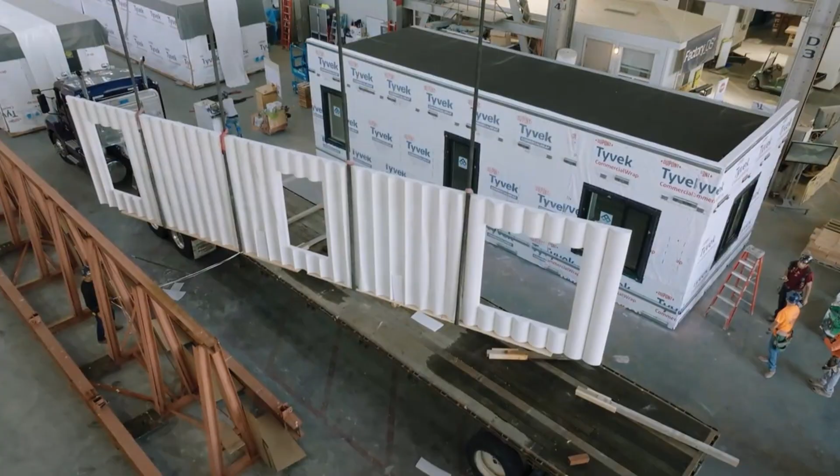Buildings are long-term assets, often standing for many decades or even centuries, and while initial capital costs can be significant, it is the operating costs such as energy consumption, maintenance and repairs over the building's lifespan that often has the greatest financial as well as environmental impact.

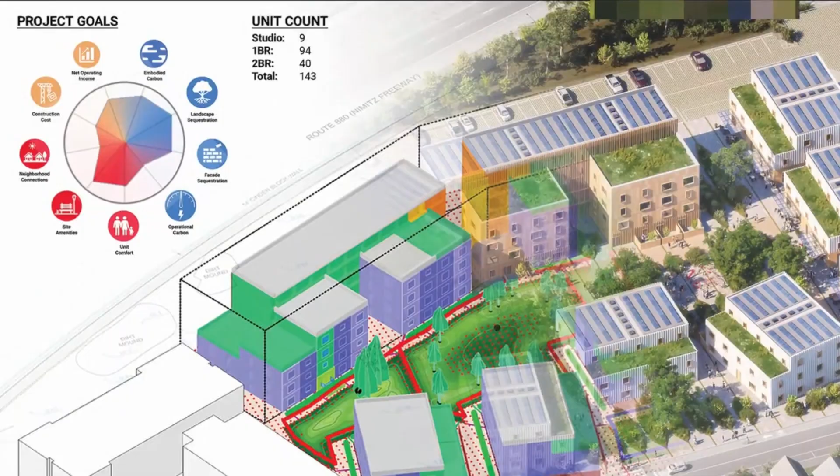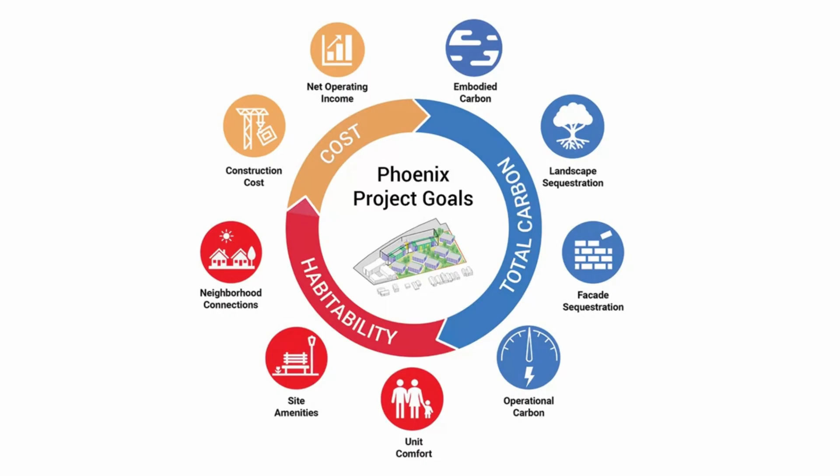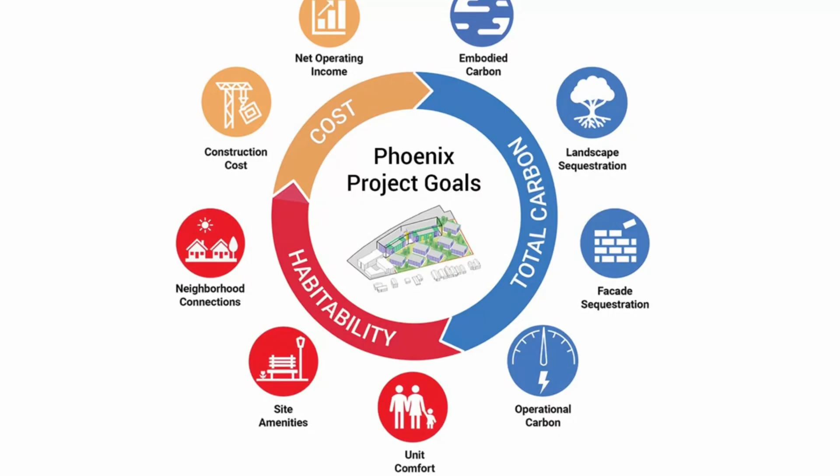Traditionally, BIM has focused on producing deliverables such as 3D models, documentation and asset information at handover stage. However, BIM is evolving into an outcome-based process where design and decision-making are guided by key measurable success metrics from the outset, such as achieving sustainable outcomes like optimized energy efficiency, carbon neutrality, or reduced waste through the project lifecycle.

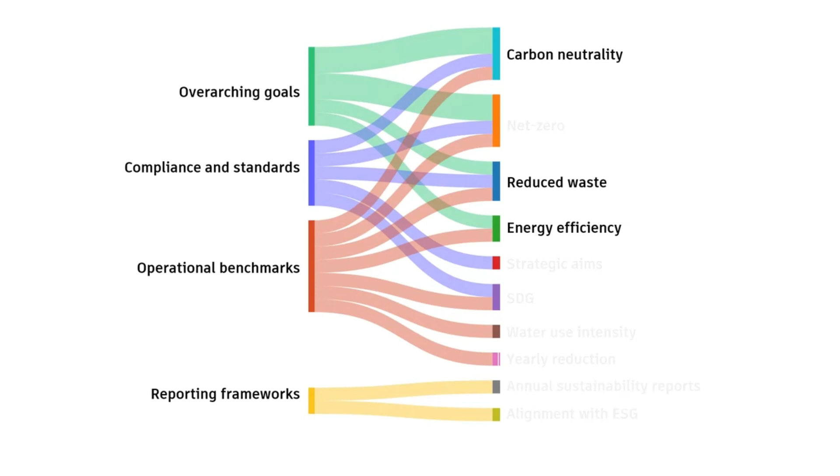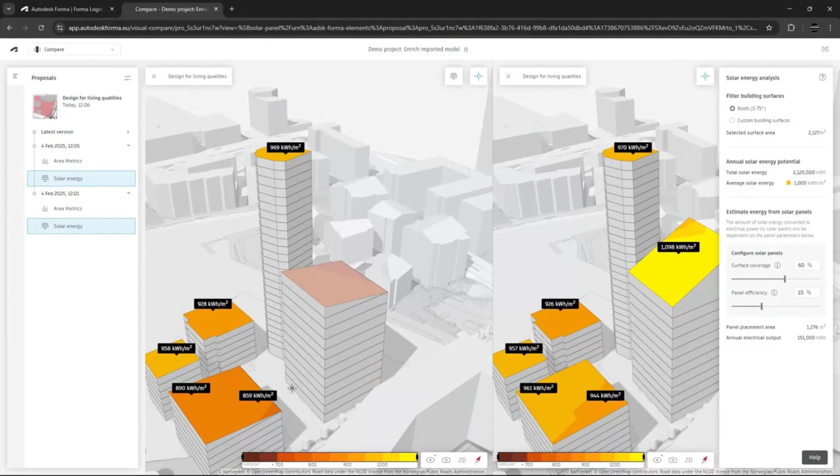In construction projects, key success factors are identified early, for example, meeting environmental and client sustainability goals such as energy efficiency, carbon reduction, and long-term operational savings. With thousands of decisions to be made throughout a project cycle, AI-driven tools can play a crucial role in processing data, performing complex calculations, and generating predictive insights. And these tools produce data that helps teams make better informed choices that align with sustainability, efficiency, and financial outcomes.

The foundation of outcome-based BIM is data. Data that is granular, accessible, and open, uniting teams across the project lifecycle. And the earlier in the design process you can analyse solar gain or measure carbon footprint of building materials, the greater the impact you can have on the outcomes.

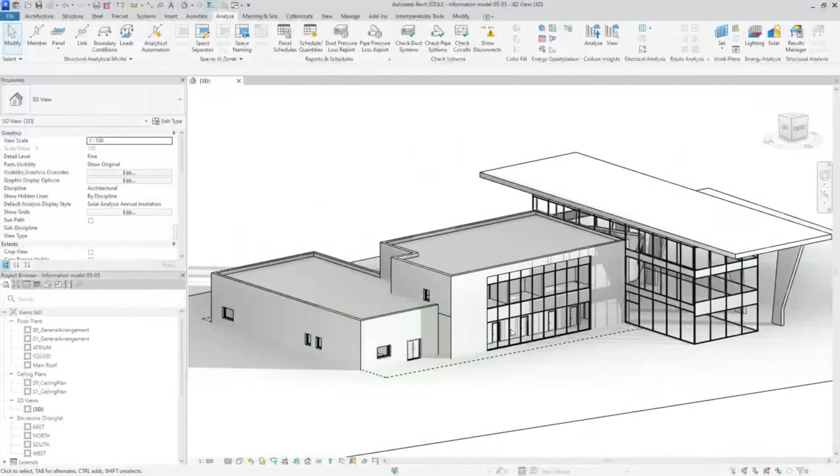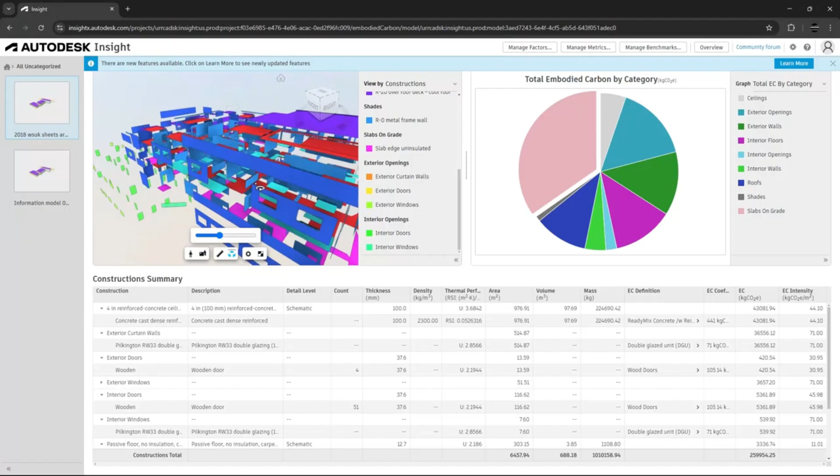This shift towards outcome-based predictive insights is made possible as AI-powered tools like Autodesk Forma allow designers to analyse design and make more informed decisions from day one. Leveraging information-rich 3D models, teams can optimise energy efficiency through early-stage simulations, plan proactive maintenance to extend asset lifespan and reduce long-term costs, and make informed design choices backed by predictive insights.

Rather than replacing designers, these tools produce data that helps teams make better informed choices that accelerate the design process and enhance decision quality through better and more informed data.

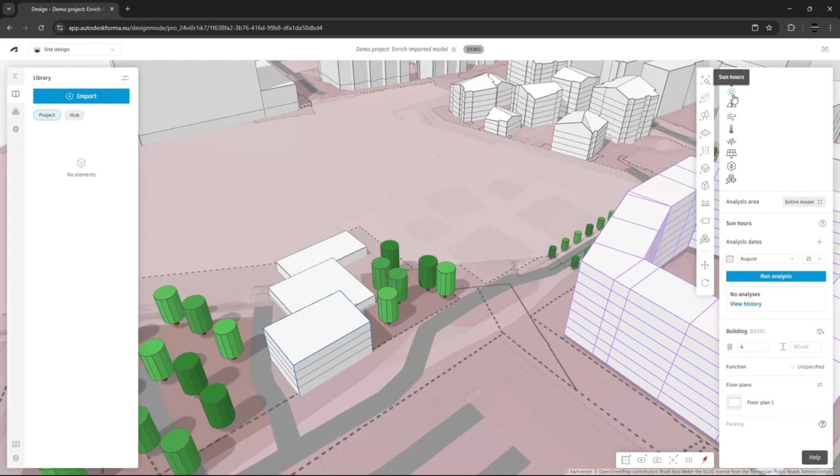Achieving better sustainability and environmental outcomes begins in the early planning stages by analysing site-specific environmental data such as wind speed, sunlight exposure and noise levels. Designers can develop more efficient solutions at the earliest stages of the project, using tools like Autodesk Forma.

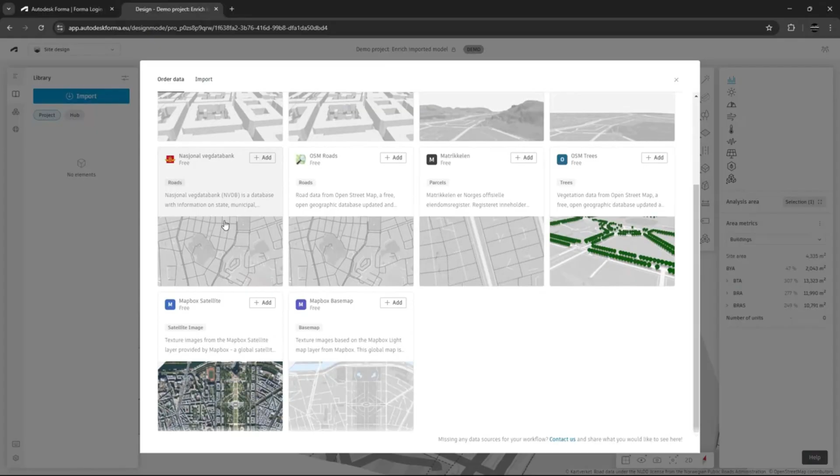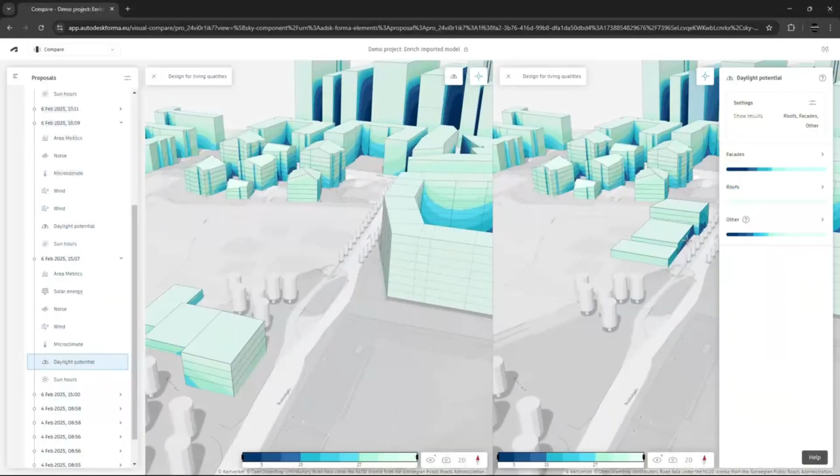This approach streamlines workflows by accessing existing contextual site data with preloaded geolocated weather conditions, massing models, and environmental insights, reducing redundant time in data recreation, saving time and cost, and facilitating centralised collaboration, ensuring that all the stakeholders work from the most up-to-date design version and can easily see the impact of decisions on the outcomes.

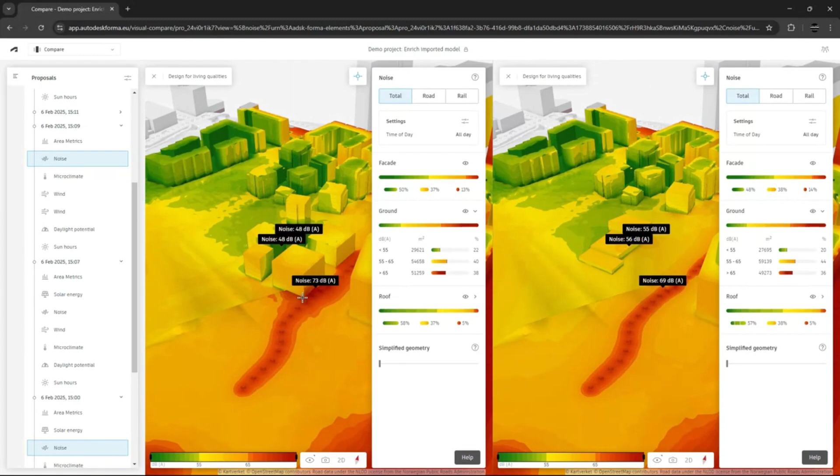Integrating environmental analysis directly into the design process allows for continuous refinement of concepts, and instead of validating designs after key decisions have been made, teams can easily and quickly maximise daylight exposure for occupancy comfort and energy efficiency, minimise noise intrusion through early-stage site analysis, and optimise building performance by balancing thermal comfort, energy use, and operational costs.

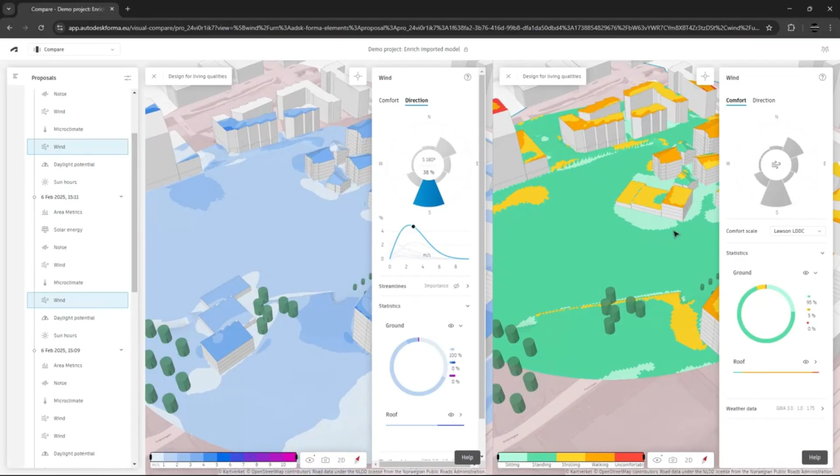While the strengths of AI lie in the ability to process vast amounts of data quickly, designers apply their expertise to balance competing priorities, and it is their decisions that ensure project goals and outcomes are met effectively.

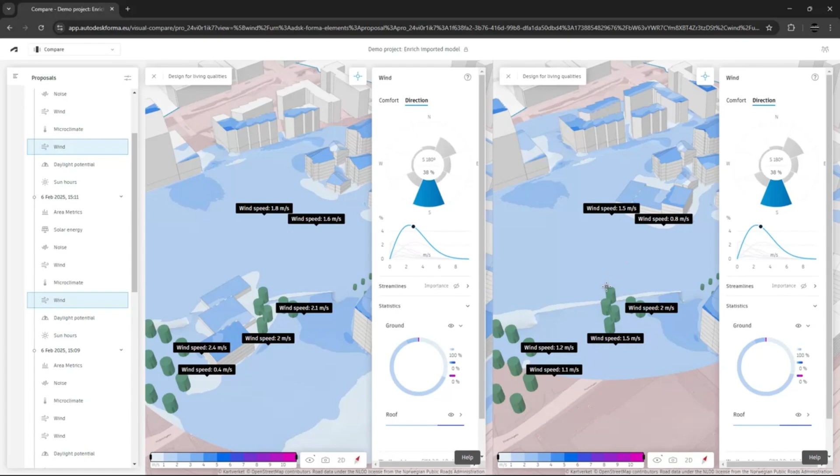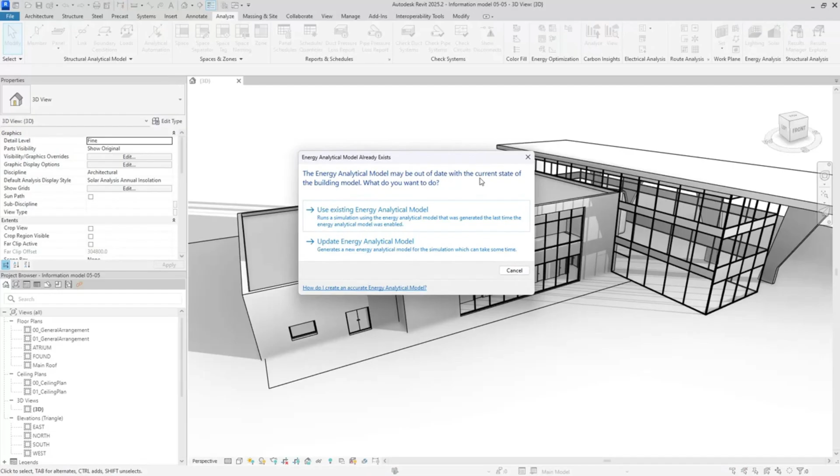Outcome-based BIM is not limited to the conceptual design stage. During later stages of the project, and with more detailed 3D models that include material performance, resistance values, as well as room function and other information, designers can create energy analytical models directly from the Revit model, which saves time and removes the need to recreate separate models for analysis.

By sending the energy model to Autodesk Next Generation Insight, the analysis is done in the cloud, and once analysed, designers can use pre-made dashboards and cards to easily report targeted outcome metrics graphically to the wider team.

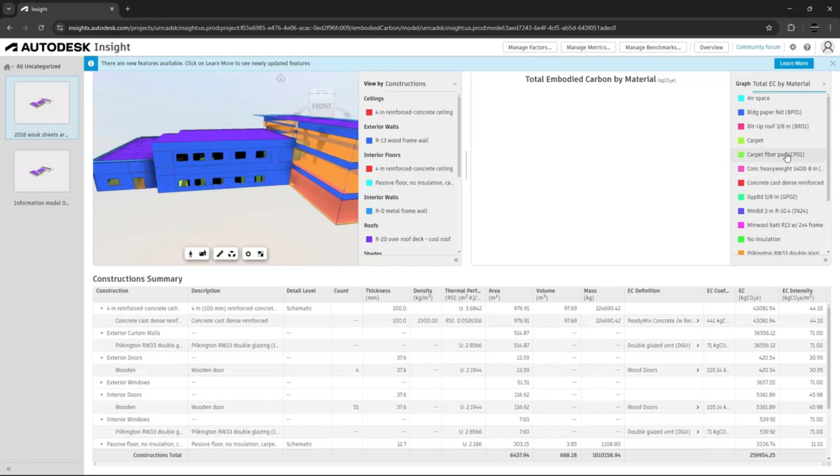Construction and other details, such as the lifespan of a building, is communicated and customisable. Changing the lifespan feeds back instantly in how it affects your outcomes in relation to total carbon.

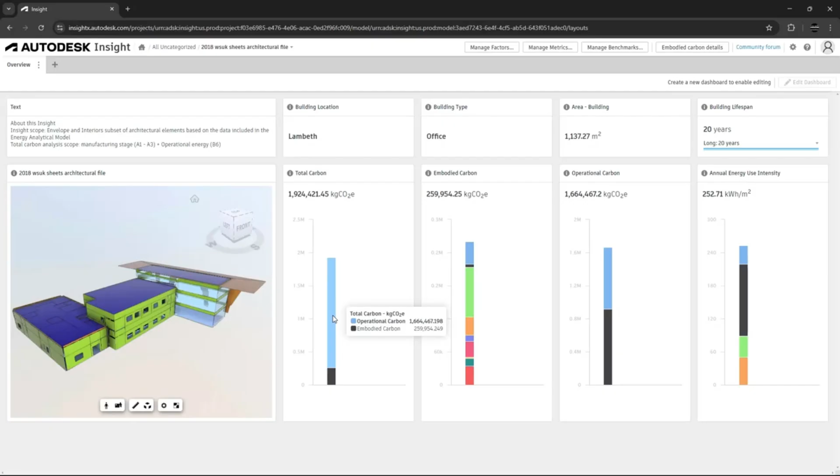Embodied carbon remains the same as expected. However, in this example, it is the operation of the building over 20 years that will produce the majority of the carbon, jumping up quite considerably and demonstrating how the efficient design of a building could have the largest impact in reducing this through reducing energy use and other performance factors.

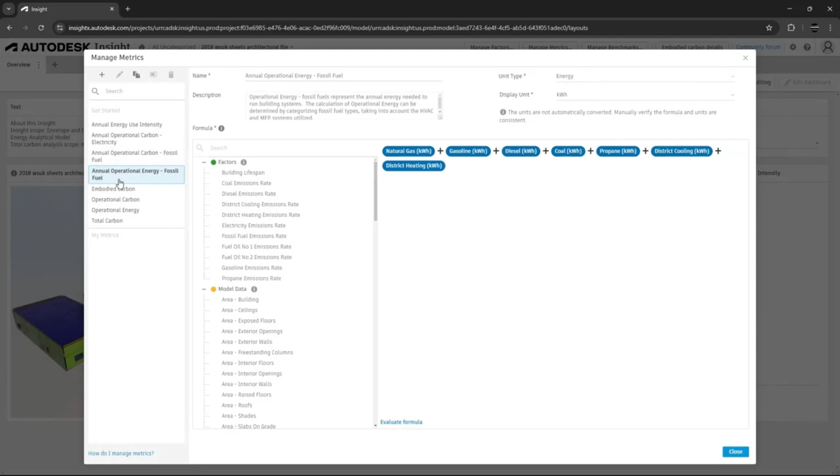By simplifying analysis through the use of AI and other outcome-based tools, project teams can make better data-driven design choices with fast cloud-based simulations, customize and track key performance indicators, focusing on the outcomes that matter most, and collaborate seamlessly, ensuring that all team members work with the latest performance data.

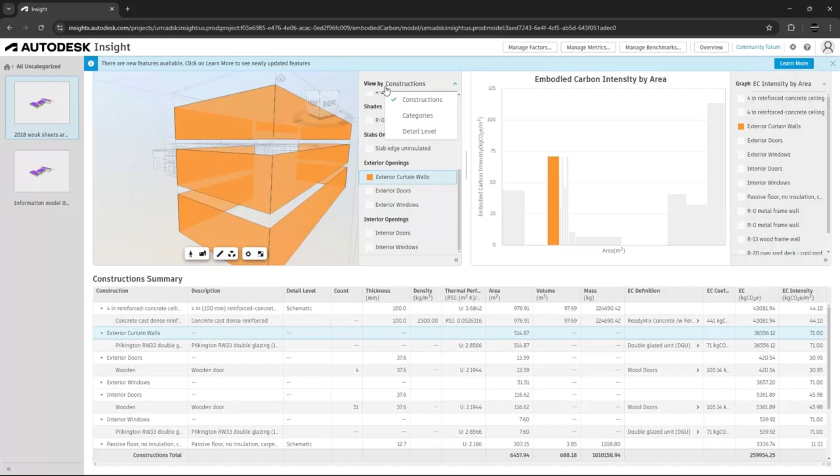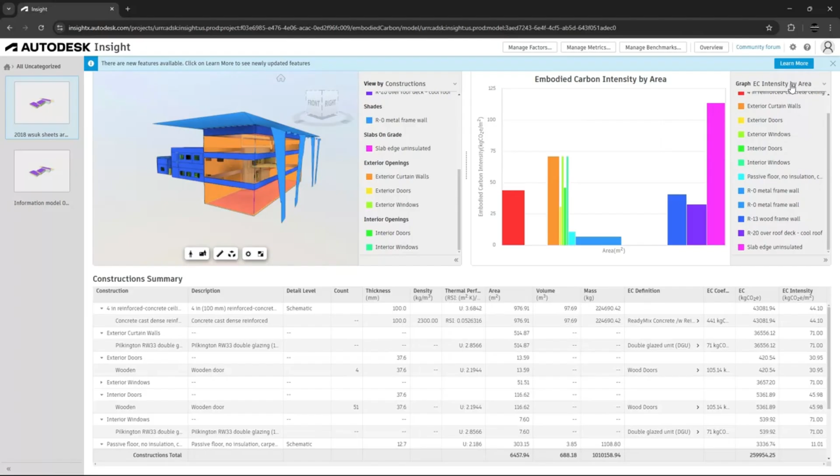Outcome-based BIM is transforming how buildings are designed, constructed and managed, unifying workflows across the teams that design, build and operate the built environment. This approach enables better data-driven decision-making, leading to buildings that are more sustainable and cost-effective for decades to come. Whether you're maximising daylight, reducing energy, or optimising your carbon footprint, better informed data is now at your fingertips.